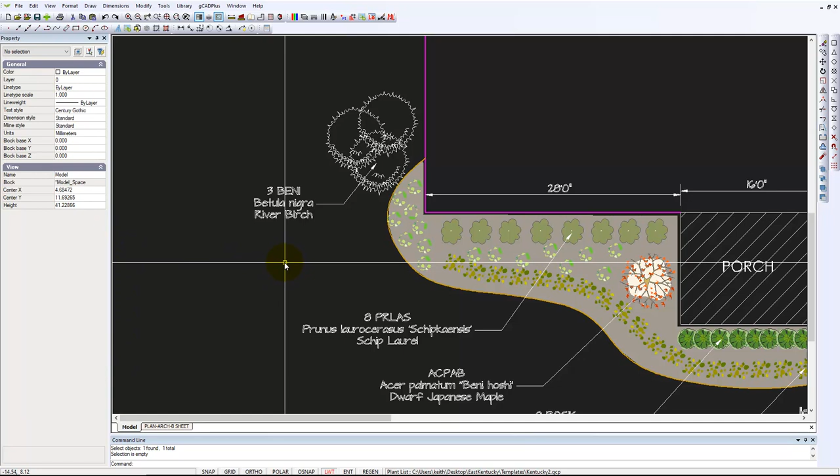Well, here is a developing design from Kentucky in the US, and so we're working in the Imperial set of units, and the designer here wants to add a whole series of ground cover planting through here, and if I click on the symbol you can see that the foam flower has been assigned to that particular symbol. Let's use view and background color, and we'll temporarily change to white.

He's been using the Smart Plant Label tool, but how do we cope with a group of massed planting of a particular ground cover? We'll go to gCADPlus, come down here, choose the Smart Label tool, and do have a good look at the prompt. Select the symbol or adjacent copies of the same symbol. You hit enter for the next step, and then when you finish, click to finish.

So we need to pick those symbols that we want to include in this massed planting, because as you'll see in a moment, we're going to count the number in that particular area. There may well be other areas of mass planting of the same group, but we're concentrating on labeling this area. So we hit enter for the next step. We now have a choice. We can just have a leader, as you see here has already been done, or you could use a single line. We'll stick with leader.

Next we're asked to input the first point of the label. We want to come somewhere into that central zone. I like to try and keep the angle reasonably consistent, and in goes the leader. And now we're asked a series of questions. Do we want to pick up the code? Well, in the plant schedule later I'll do a custom schedule, so we'll say yes. Botanical name, yes. Common name, yes. Do we want the count? Yes. How many are in this group?

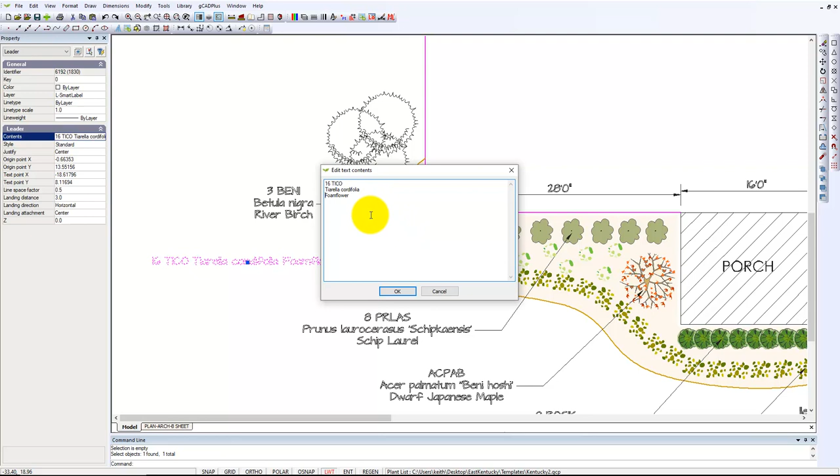And we hit enter. So it is now labelled, because each one of these has been tagged to an entry in the accompanying plant database file, which we've called Kentucky 2. What I want to illustrate is, if you use this system, you have great control over the layout of that text. If we edit the text now, logically you might want to say 16 and give the shortcut the code for it, and then we've got another line for foam flower. So we can say, okay, can you see that compacts everything in that small group?

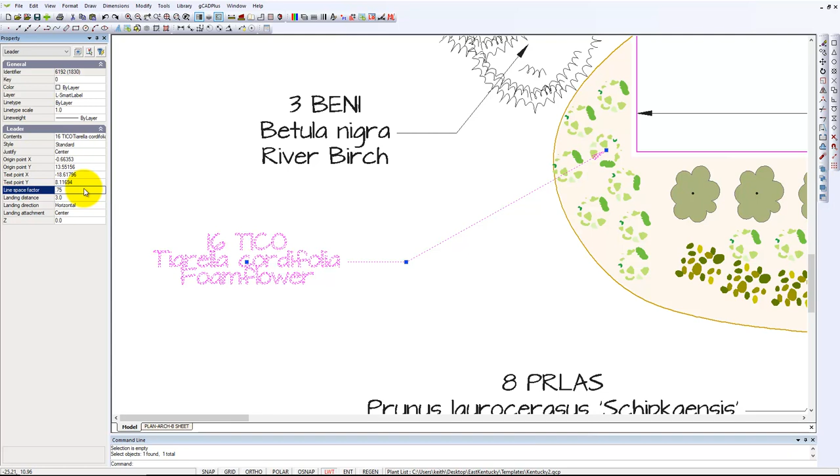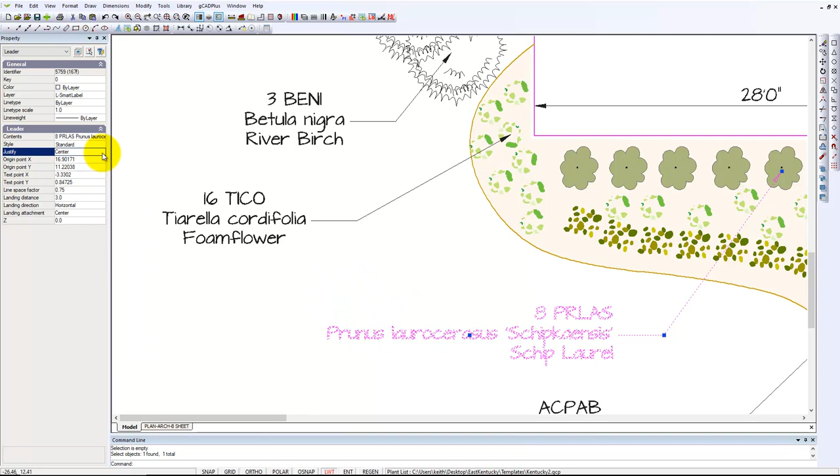Notice that the spacing's a little tight, so you can just alter the spacing in the properties box. Line space, you might say 0.75, and that will match the others, and that's looking neat. However, if you come to a layout such as this one here, which is quite a long name, you also have control over the justification of that group. We can say we want it left justified, or right justified, or center. So can you see that tidies things up just a little?

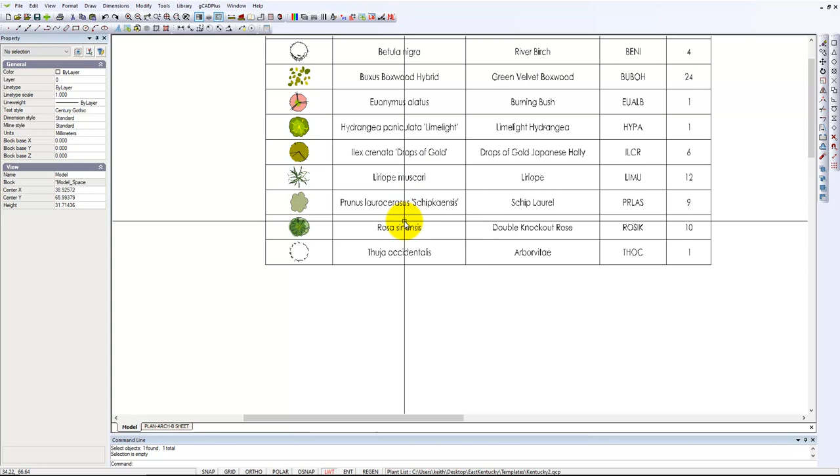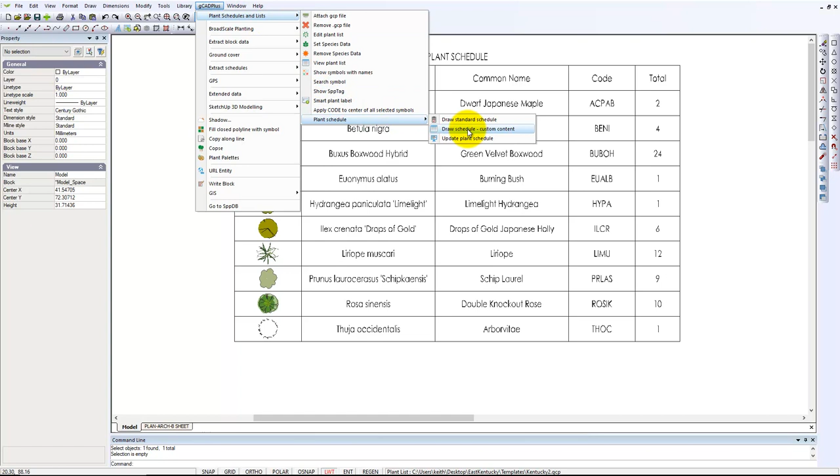So when we run the plant schedule, it doesn't include this one yet because we've just put it in. Can you see we've got the botanical name, we've got the symbol, common name, and that code that's just gone in. So we can run that plant schedule again with custom content. I'll say we want the symbol, yes we do. The markers, no. Type, we don't want to know if it's tall tree or ground cover or what.

Do you want to include the code? Yes. The pot size, no, we don't want the pot size. Botanical name, yes. Common name, yes. Print common name under, I prefer to say no to that.

We'll just get rid of that email that's coming in.

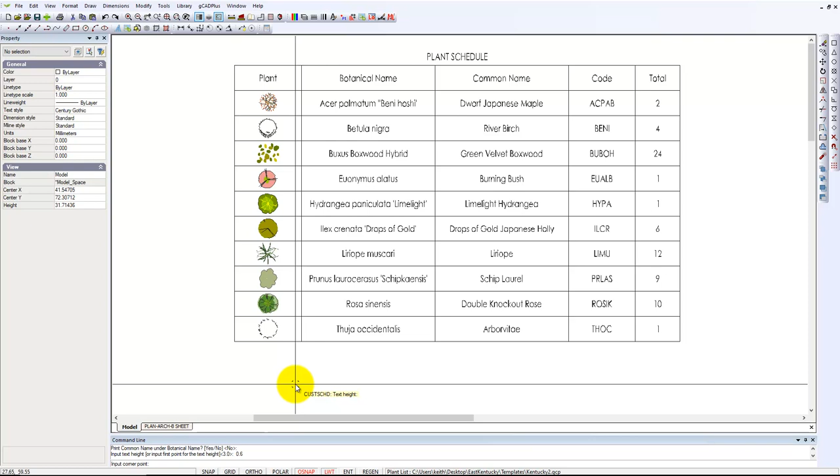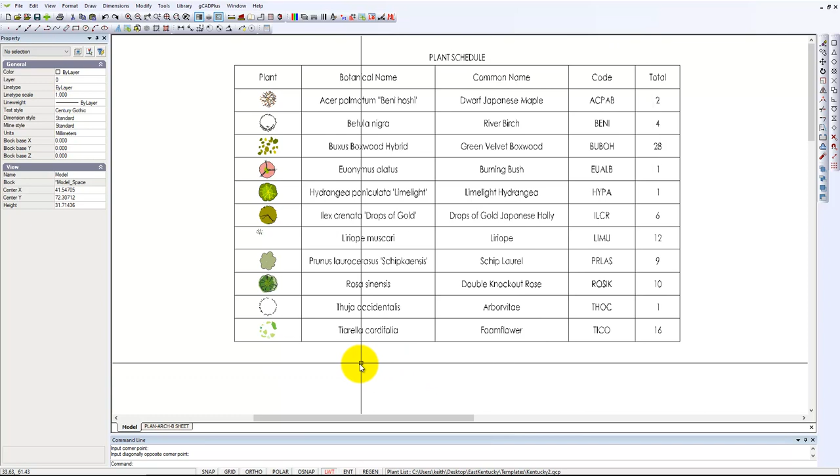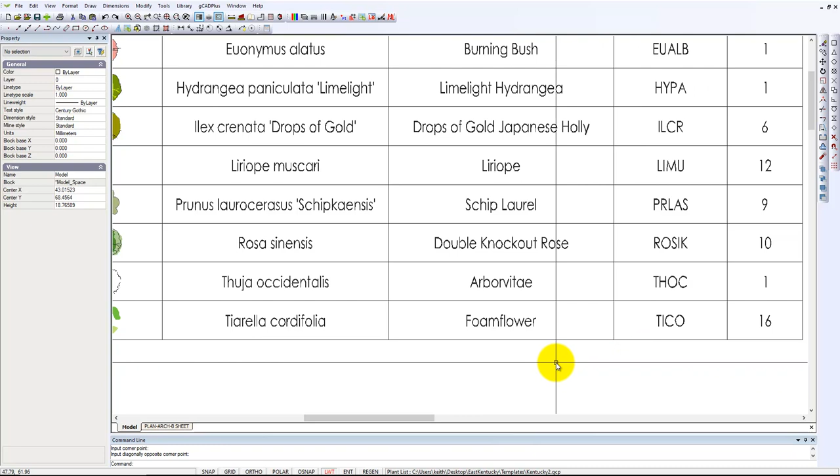Now the text height, I may have to run this one again. We'll try 0.6. Click in there, text height 0.6. This is only a guess, and corner point there, other point there, and it's now updated. Fortunately, that was the last entry, and that little group of 16 instances of the foam flower now goes in, and we've now dealt with our design.

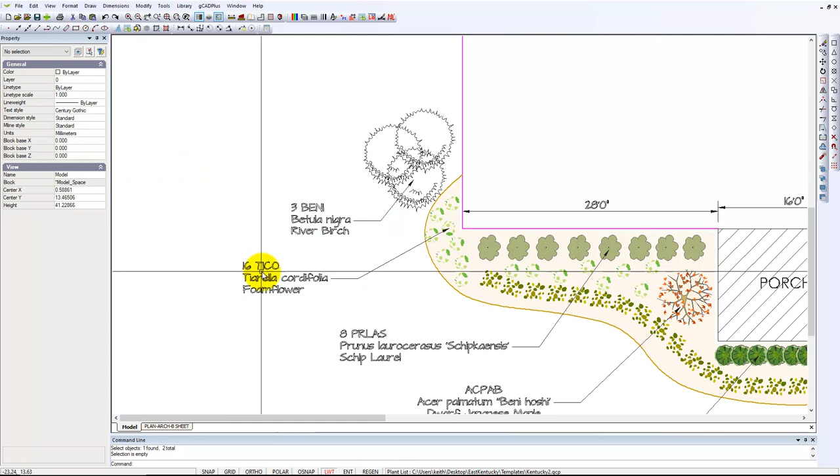We've improved the design, and in a future release of gCADPlus we would hope to be able to do match properties and match those. Pretty sure that doesn't work. It's on the wish list, so we go to modify, match properties. We're happy with that, and we can go there, and you can see it doesn't work, so it's a little tedious. We would have to pick those, and we should be able to go to justification left in a group, and I'm relatively happy with that, but we will fix things up in a future release.

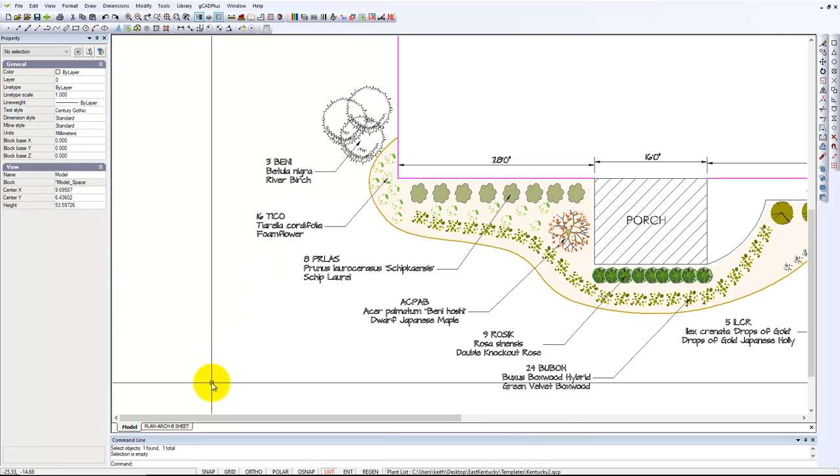Can you see that using leaders to label gives you great flexibility of how the text is laid out and the positioning of the leader itself. I can fine-tune and spend considerable time tweaking things. But now we go on to our layout sheet, and you can see the information we've just added goes in.